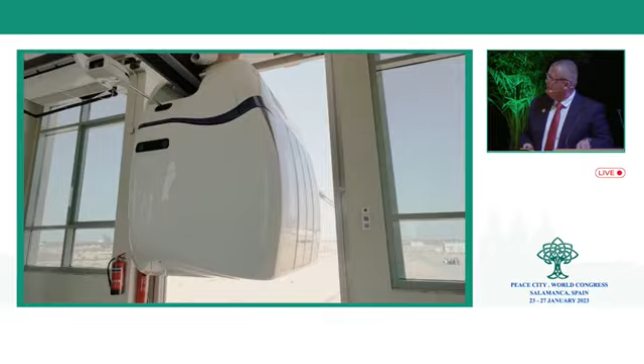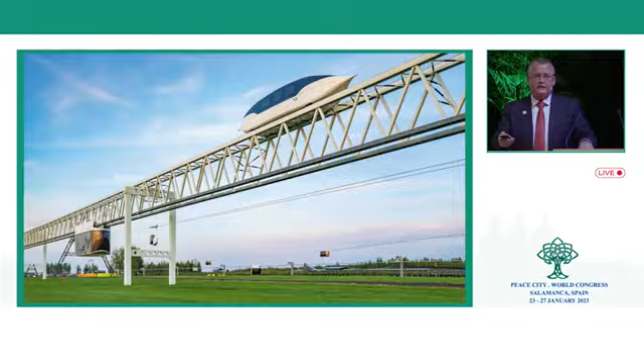Speaking about smart and sustainable city, we cannot avoid the issue of transportation and mobility. Actually, this is the key point, and the ability to overcome distances in the shortest possible time is one of the distinctive features of our civilization and certain condition for further development and growth. Transport accessibility is the main reason the first settlements emerged. Half an hour that people require to reach their work, their office, their friends, is the time that provides comfortable living for everybody.

So just to prove it: when people walked, the overall dimensions of the settlement were limited to 2-3 kilometers. When horses and carts appeared, the size of the city grew to 10-20 kilometers, which was London, for example, in the Middle Ages. And in the 20th century, the size of cities grew to 20-30 kilometers due to the appearance of cars and buses, that makes the same half an hour of traveling to any destination in the city.

But now, in the 21st century, what we observe is the complete collapse of urban transport systems due to road congestion, traffic accidents, and some other points. The permanent growth of cars led to the fact that now, for example, the average speed of public transport in Berlin is around 6 kilometers per hour, and in Washington around 3 kilometers per hour. This is lower than pedestrian speed.

It means that now our cities have lost a comfortable living environment, and road transport can no longer cope with its main task. In future, this problem will only become worse because more and more new areas are being rolled up with asphalt and concrete, and still the growth in the number of cars is many times ahead of the required road construction. Sustainable smart city developers like Peace City World should reconsider this challenge again and again, looking for solutions.

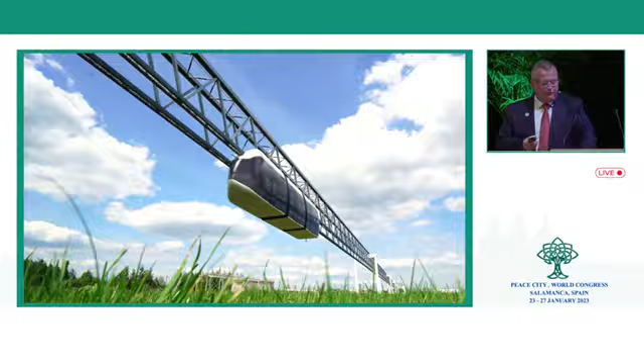So many companies, many persons, many parties nowadays use sustainable city and ecological points and other things just to get sales for marketing purposes, and sometimes maybe political benefits. But when you start to go deeper into the problem, you understand it's not easy to find solutions truly ensuring the transportation of people and cargo, especially on the priorities of ecology, innovation, comfort and safety. The problem is that even when such solutions are found, it is extremely difficult to reach the implementation stage.

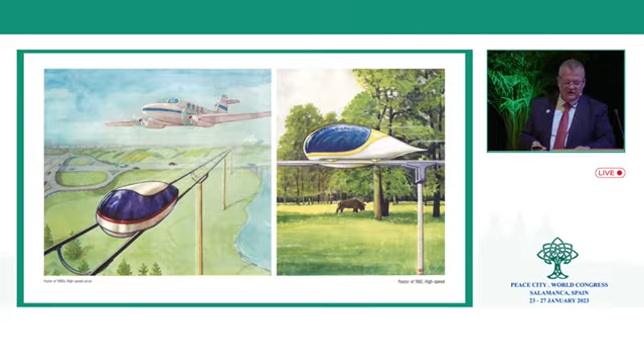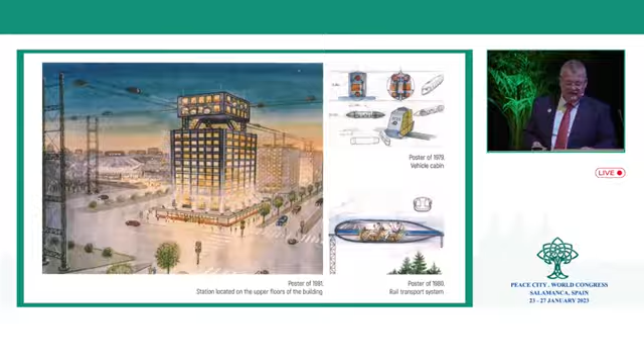Also, there are advantages, and most important, their total matching to the requirements of new cities is obvious. 50 years ago, the scientist and philosopher Dr. Anatoly Unitsky invented a new type of suspended transport, called string transport. All these years, the scientist has devoted himself to the development of suspended string transport technology, having gone from calculations and drawings to fully fledged operating lines, creating, in fact, a new transport industry branch.

Currently, I am sure, and I will prove it here, that suspended string transport is the transport of a new generation, the transport of the future, the transport completely suitable for new, sustainable, and smart cities.

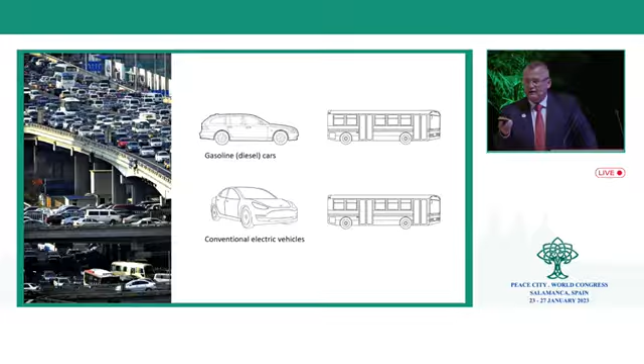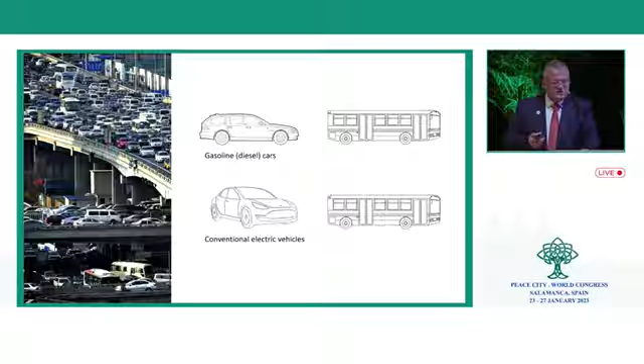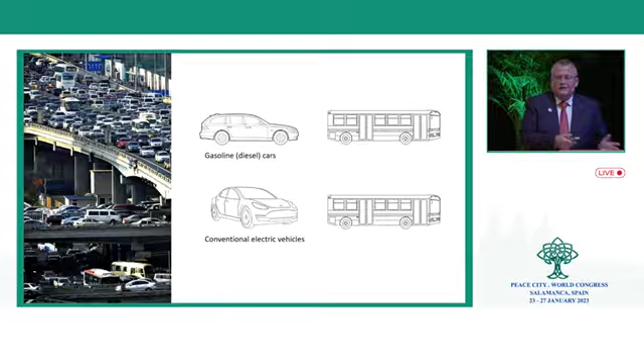Let's figure out why. Nowadays, it is almost unanimously considered that the future belongs to electric vehicles, electric buses. They mention a lot of electric buses. But we forget that electric vehicles, electric cars, electric buses occupy the same place on the asphalt, and they carry the same number of passengers. This means there is no solution to the transportation problem of traffic jams. There is no difference between modern cities jammed with petrol cars and future cities critically overcrowded with electric vehicles. We are just changing one vehicle for another, but traffic jams will still be there.

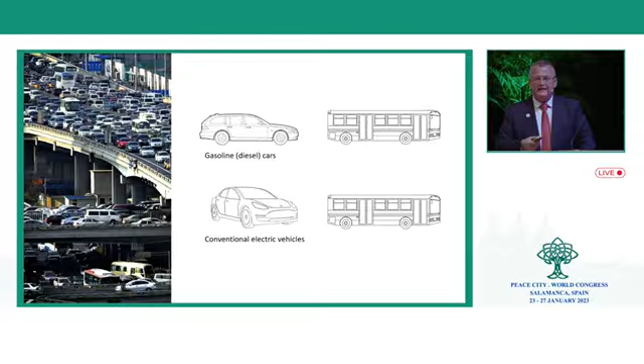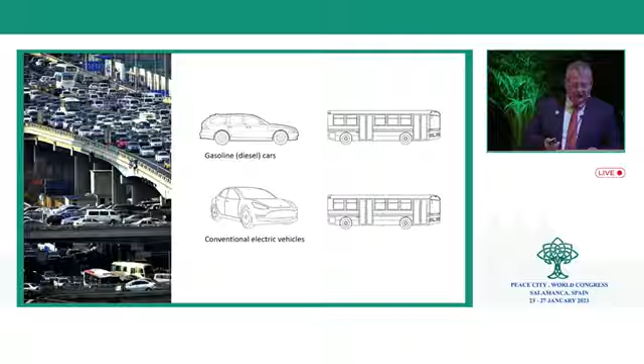This means that in order to find a solution, we would again have to put down thousands of kilometers of additional asphalt and concrete, but again, I am sure that this is not the solution and not the way out. Even the exhaust gases issue could be scrutinized in a different way.

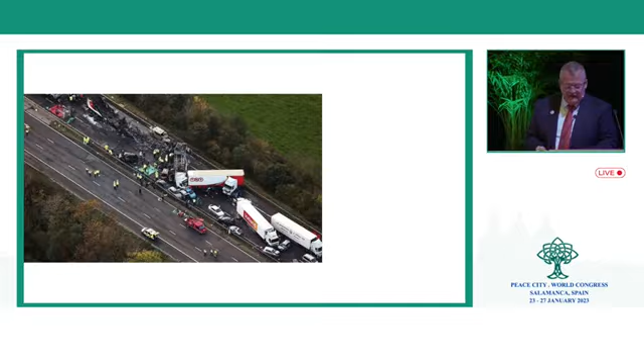Exhaust gases containing dozens of carcinogens are also emitted by electrical vehicles, but at the power plant. And even more hazardous waste is generated at factories that produce and utilize lithium batteries. So the more electrical cars we have, the more hazard to nature we will provide. And one more thing: electrical cars will get into traffic accidents exactly the same way as normal petrol cars.

They get in traffic accidents, they maim and they kill people. They are driven by the same drivers who can fall asleep at the wheel or drunk drive, for example. So it means that...

The genius of Anatoly Unitsky's solution is related to the idea of transferring all transport trajectories to the second level, located above the surface of the Earth. Suspended string transport practically does not occupy the land surface, so it is not necessary to cut down trees and forests, or to lay asphalt on the grass and flowers for its passage.

The autonomous character of the unmanned electric vehicle on steel wheels, collectively known as uPods, will make smart cities not only smart in terms of transport, but also really safe. There are no pedestrians, no children running across the road, no other personal cars, no bicycles, because our transport travels on the second level, controlled by a multi-level automatic control system that provides uPod electric vehicles with real autonomy and safety.

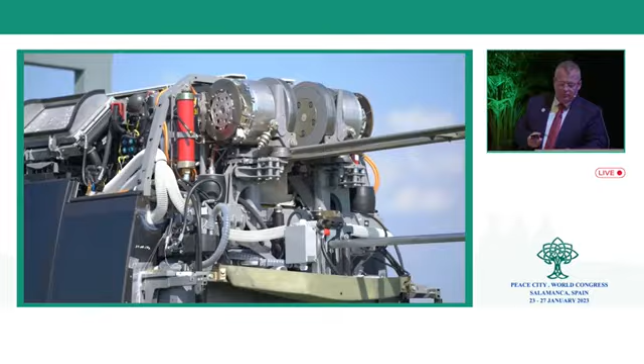Moving with steel wheels on steel rails suspended in the air, against minimum resistance to movement, the uPod electric car is at least 5 times more efficient than a conventional electric car that travels on asphalt with rubber tires. The uPod's exceptional aerodynamic shape also reduces energy consumption when driving.

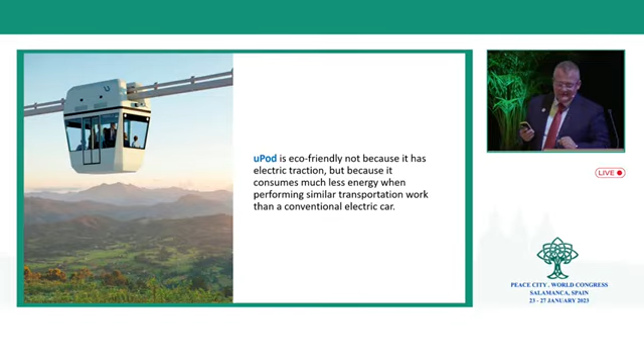So now, attention please: uPod is eco-friendly not because it has electric traction - it has that - but it is eco-friendly because it consumes much less energy when performing similar transportation work than a conventional electric car.

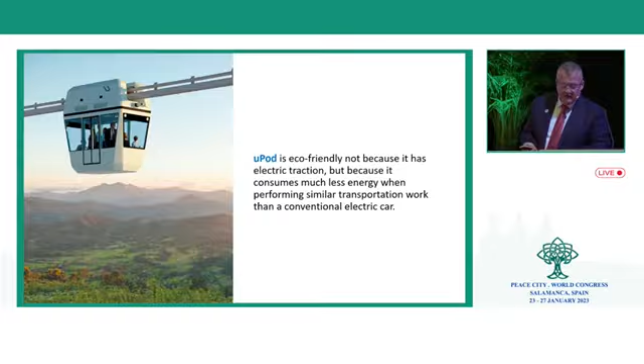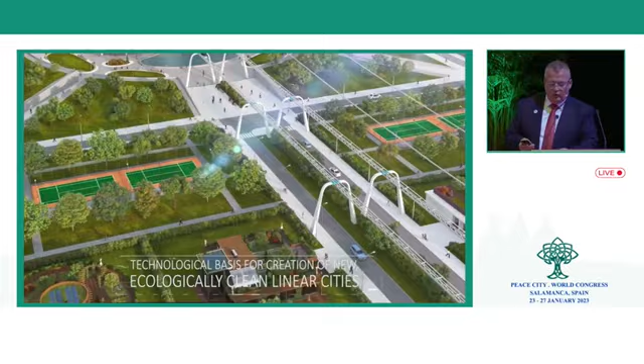Suspended string transport gives sustainable and smart cities a chance to leave land for parks, lawns, sport facilities, and preserving historical destinations. Already an area of more than 5 Britain-sized islands has been covered with asphalt and railway on this planet. Unitsky technology has the potential to bring this land back to people, since the land allocation required for suspended string transport is 100 times less than what is required to build a road.

It is important, of course, that new technologies be accessible and commercially feasible. So I will not name projects that are still just words and nice pictures because of their technical impracticability and commercial...

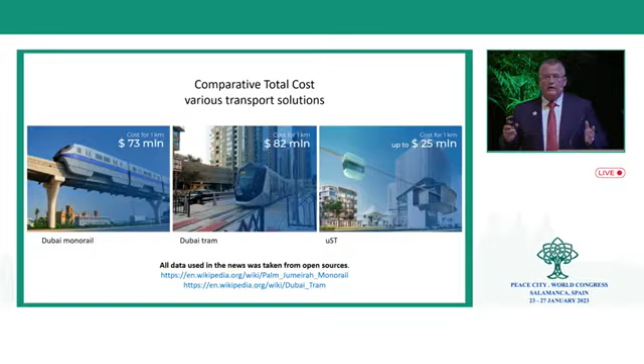If compared with traditional roads, railways, bridges, flyovers, and overpasses, the material consumption of a suspended string rail transport overpass is 100 times less. You can see that we don't require these huge concrete structures, we don't require bridges, and our material consumption will be much less.

The construction of the Unitsky transport and infrastructure complex does not require huge investments associated with significant excavation works, the relaying of communications, the construction of bridges, overpasses, interchanges, pedestrian crossings, and hydraulic structures.

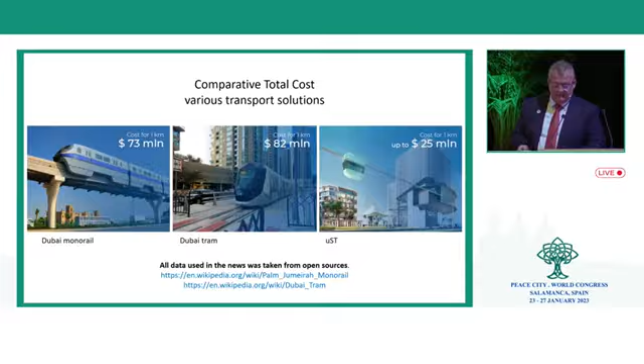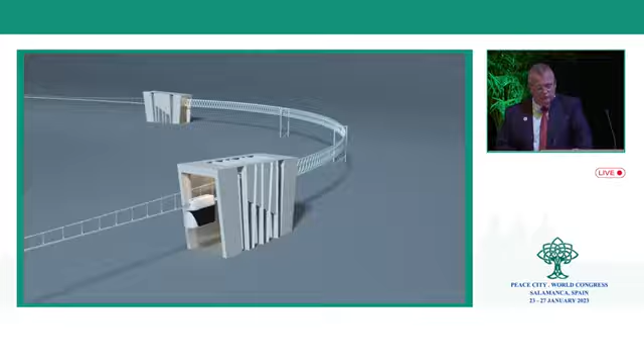Suspended string transport will move at an average speed of 60-80 kilometers per hour and will be the fastest public transport on the planet. For example, the London Underground has an average speed of around 45 kilometers per hour. This means less energy is consumed to move, and fewer vehicles are needed to transport the same number of passengers.

Suspended string transport technology provides solutions to all transport problems in an easier and cheaper way than anything the market can offer today. The possibility of solving problems using Unitsky technology has been practically proven and tested at the certification center in Sharjah, United Arab Emirates. And I invite all of you to come test it. We will give you a ride, you will board the future.

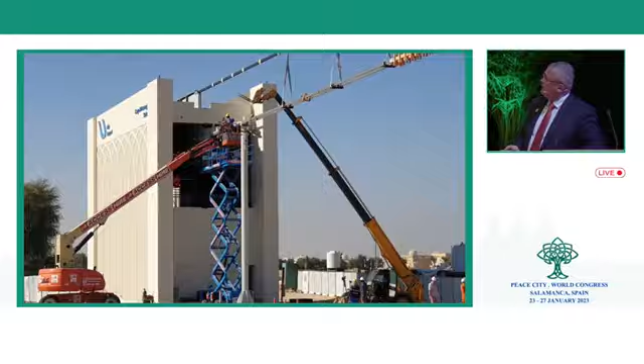And now we are building two more lines with a total length of 5 kilometers that will move not only unibuses, but also containers, because there are also solutions for container cargo transportation, creation of terminal-free seaports where containers will move directly from the ship to the dry inland container terminal.

Due to this, public roads will not be overloaded with heavy trucks. All logistics will be carried out automatically, and all the land under the suspended string transport line will be used for its intended purposes. At the final stage of development, there is a high-speed U-Port, the model of which you can see on our table downstairs.

It can move with speed up to 500 kilometers per hour, while at the same time being environmentally friendly, safe, and economical.

Again, it's available in Sharjah, so you can come and see.

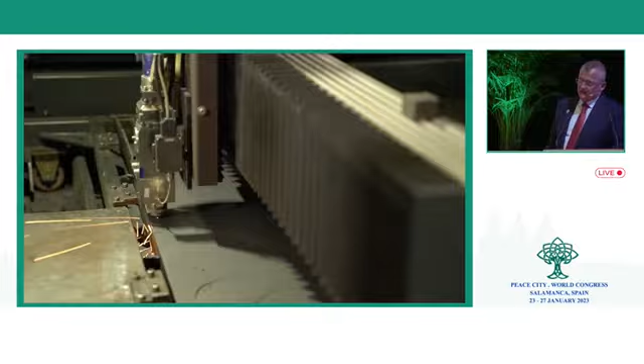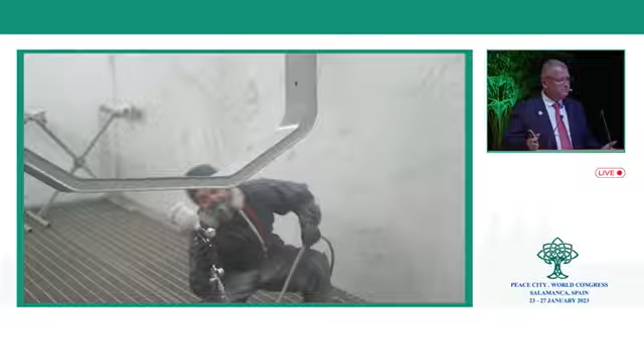Summing up, I want to say that there are already ready-made solutions to the challenges that developers of future sustainable smart cities face today. But still, all such developers, like Peace City and others, should have the ability to see new developments, to evaluate them, and to take certain risks to apply them, because like any new technologies.

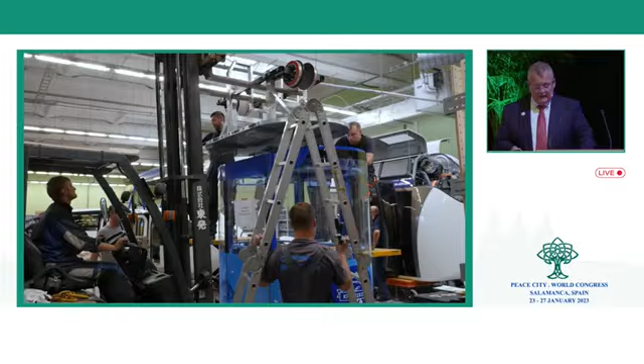In conclusion, I want to say that our group, which includes more than 20 companies, looks to the future with confidence, because under the leadership of brilliant scientists, we have created a new branch of industry that can help humanity make a technological breakthrough, like railways did in the 19th century and cars in the 20th century. And here we are not limited only to the field of transport.

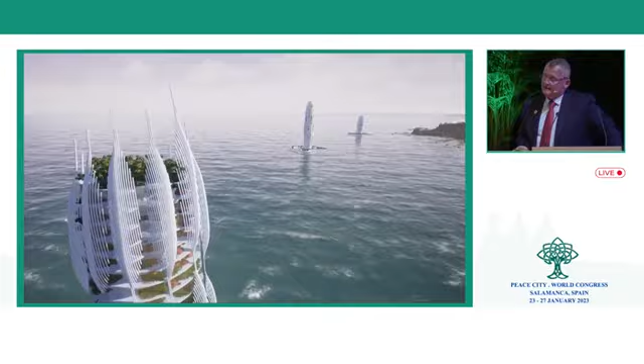New settlements could be set up and a new generation of buildings could be built, connected with our string transport. Given the time allowed for this speech, I cannot go into more detailed description of the innovations, but I ask everyone to watch a very short video about future linear cities. Again, this is the development of Dr. Unitsky and our group of companies, showing how suspended string transport technology will work in these sustainable and smart cities, for the benefit of those who will live there and in the interest of all mankind.

Being away from the hustle and bustle of the city, communing with nature, but at the same time enjoying all the benefits of civilization and using your time most effectively. This is possible only by overcoming global problems of our time, such as overpopulation of cities, environmental pollution, and historically outdated infrastructure.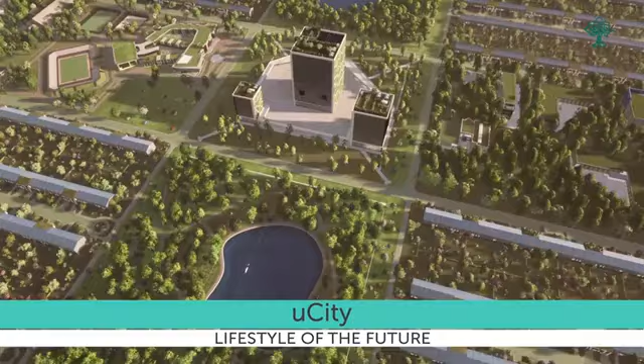Linear cities, uCities, allow you to combine a healthy environment with high levels of comfort and transport accessibility, opening the way to the lifestyle of the future. The construction of new type settlements is carried out according to the logic of the smart city, in which land belongs to pedestrians and plants. The basis of the linear city is pedestrian clusters with low-rise buildings.

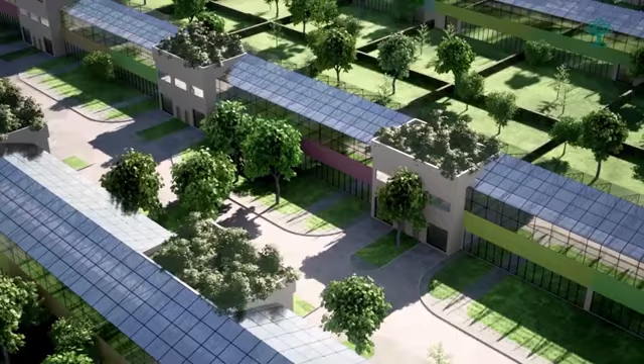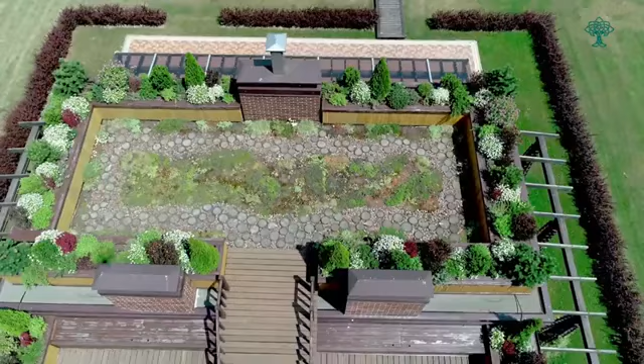Bioelectric power plants, along with generating energy, are capable of producing up to 50,000 tons of humus per year from coal and shale waste. These products are in great demand in the world and can become a key element in the development of the colossal export potential of any territory.

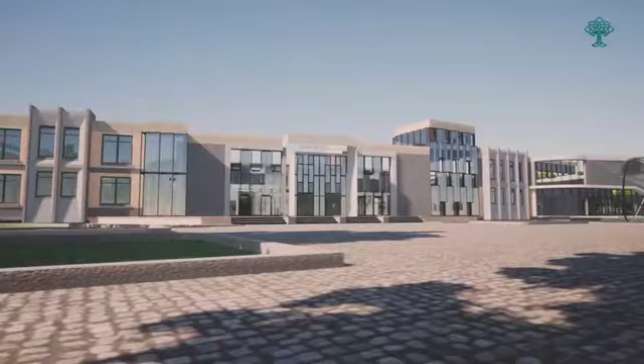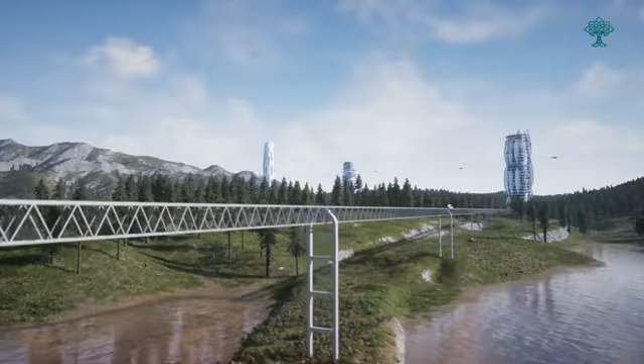A distinctive element of each linear city cluster is a multi-purpose dominant building with a built-in station of the Unitsky String Technologies transport system. If necessary, these systems can connect the cluster with the city next to which it will be built, providing high transport accessibility and ensuring integration into existing infrastructure.

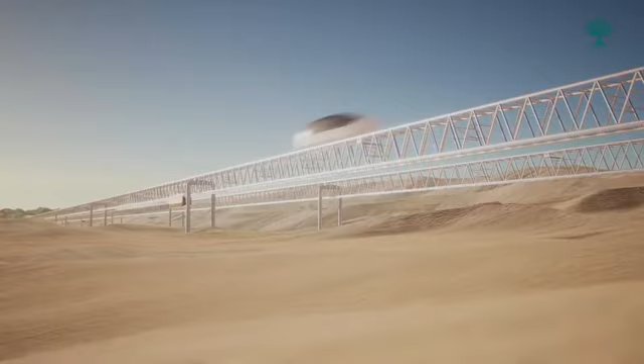Power, information, and other utilities can be placed in the string rail's body, the know-how of which is protected by patents of the developer company.

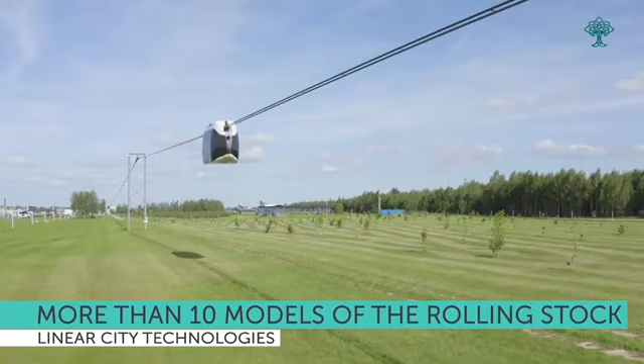Currently, the technologies that are part of the uCities are implemented on the territory of research centers in Belarus and the United Arab Emirates. Six types of innovative buildings have been built and are being successfully operated. Six types of elevated communication overpasses and more than 10 fundamentally different models of passenger and cargo rolling stock have been erected. All types of transport, technologies, and know-how were created thanks to the many years of work of engineer Anatoly Unitsky and his company.

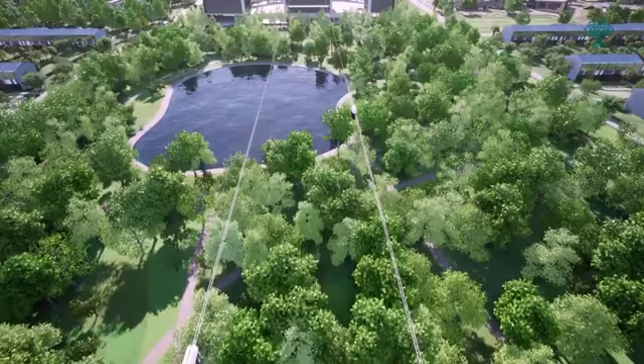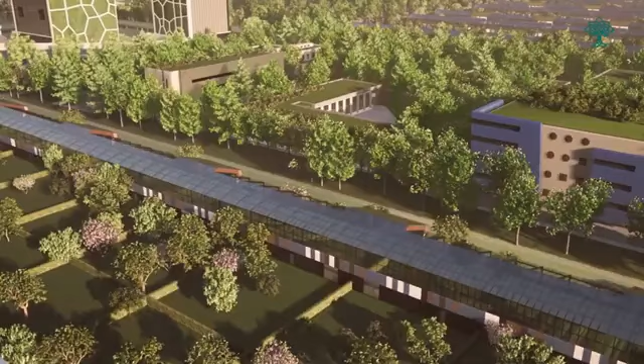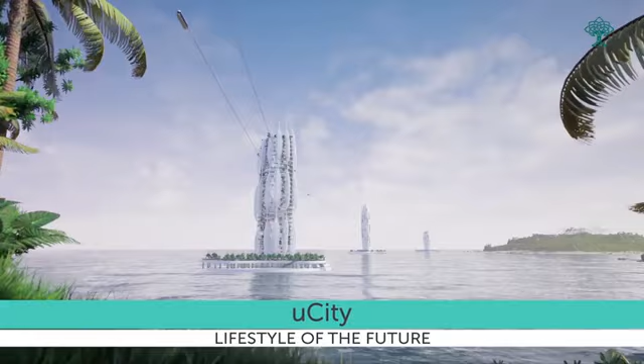uCities can become a powerful, innovative driver of economic development based on the introduction of natural technologies into industrial, residential, and transport infrastructure, power industry, and agriculture. In the future, linear cities will be tens, hundreds, and even thousands of kilometers long. They will harmoniously fit into any existing natural landscape, preserve regional and global ecosystems, and allow efficient development of remote and inaccessible territories, setting a new standard of settlement that meets the challenges of the 21st century.

Thank you very much.